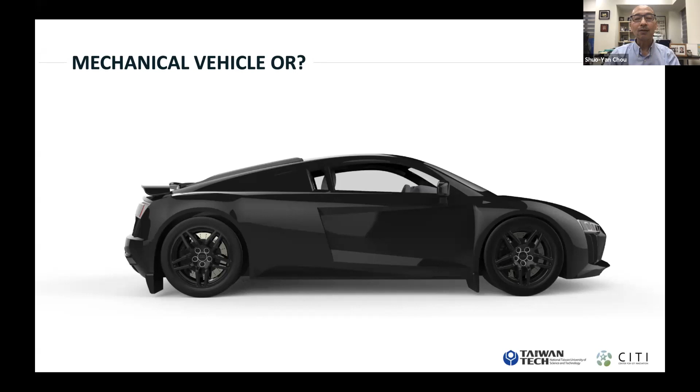Another thing I want to mention is traditional products which were numb, without any feeling or sense - for example, a car. Maybe most of us still think a car is definitely a mechanical thing. It was, particularly when using fossil-based energy. But now a car is basically a complex computer on four wheels.

Cars contain all kinds of sensors. Electric cars are powered by electricity - they don't have an engine, they have a battery, they have motors, and the rest will just be the body.

And then cars have a lot of electronics, lots of electronics. In fact, around 2015, on average 30% of the cost of a vehicle came from electronics and software already. There's a prediction that by 2030, or some say 2035, on average for a car, 50% of the cost will come from electronics and software.

For high-end cars it will be 70%, for driverless cars it could be up to 90%. So is it a mechanical product or an electronic product? It's just like our computer - it has a physical part, but it's all about function, just like our smartphone. Smartphones have all kinds of apps and chips which make them powerful. Cars will be like that in the future.

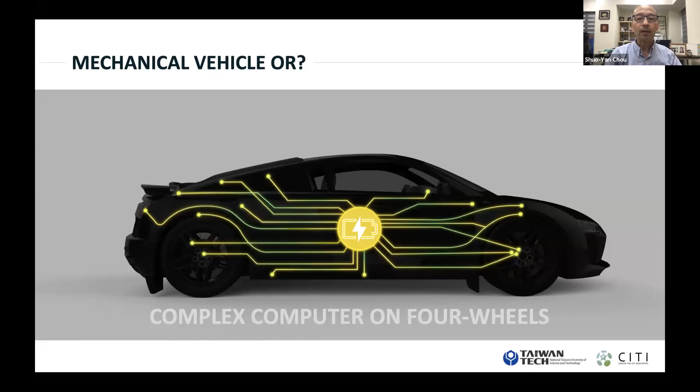In construction and buildings, we can also utilize RFID or sensors so that they don't need to be senseless again. The building is being built and everything there is numb, no sense, but now we can have all kinds of sensors. If some pillars tilt, we know. If the concrete was poor and moved on too early, we can sense it. And if a worker fell because of the sensor on the helmet, we can know.

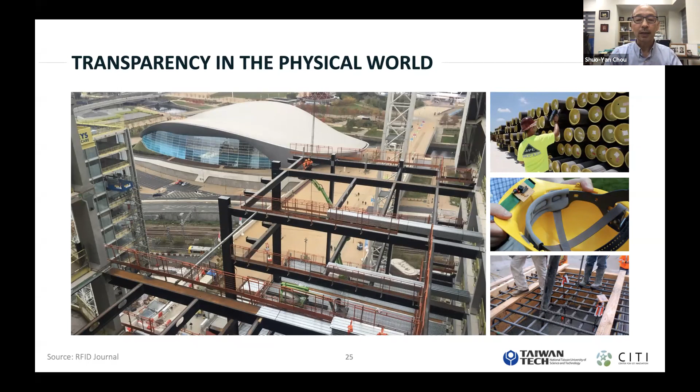When we want to pick up a certain item for the construction, and all of these parts look the same, we can use RFID and clearly identify that item. We can also count objects in the environment because we have a camera as a sensor. There are many different kinds of sensors we can use so that our construction work can also be more effective. It doesn't have to be numb, just there. Whenever we want to know what's going on, we need to have people going there, checking around, writing things, calling people. They can provide information to us constantly or continuously.

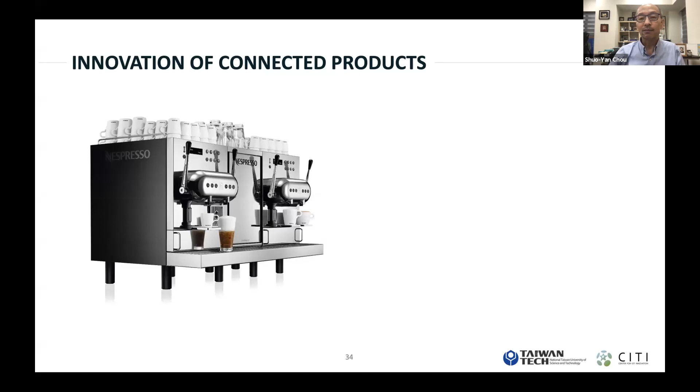You can think about it. There are many possible applications, and they have been developed by many other people too. I have some examples, but I think I'll just skip it for now. I want to show you a few videos at this point. Let's see.

Let's just say, if I'm asking about a helmet, we ride a motorcycle, we need to have a helmet, right, to protect our brain, our head basically. Although our hands and legs can be injured, our head is most important. It could be fatal. So we need to have a helmet protecting our head.

So if I said there could be an IoT helmet, what kind of helmet can you think of? An IoT helmet, think about it. What kind of sensors do we need for a helmet that would be helpful, or what kind of innovation can you come up with? Maybe you can type on the messaging board: what kind of sensors we can add to the helmet and how does it help us, or what kind of problem we have with the helmet and how can we resolve that problem using IoT technologies, basically sensors and responses.

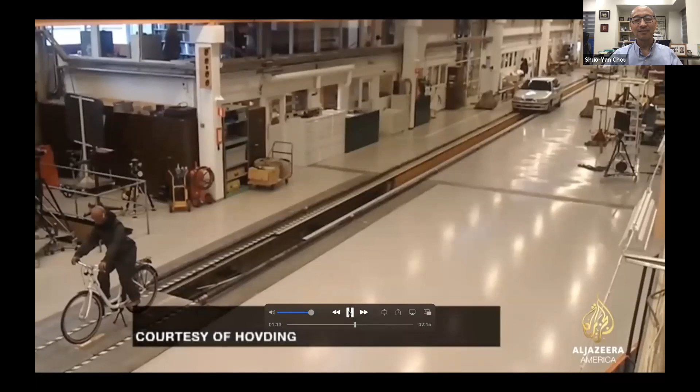Unlike a traditional helmet, the Hovding is wrapped around your neck, you zip it up, and you activate it. Now I'm fully protected and ready to ride. The collar has sensors which analyze movement patterns 200 times a second to determine when a cyclist is in a real crash. When that happens, an airbag deploys and wraps around your head and neck.

Each year, 300 people sustain head injuries in cycling accidents, and road safety experts say any initiative to protect riders is welcome. In Sweden, we have like 20 to 30 killed every year. Of course it's worrying, and we are working now to increase helmet use.

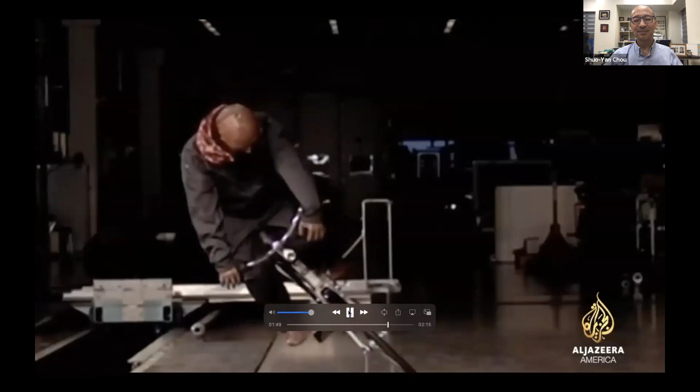Once the Hovding is deployed, it can't be reused. And at $540 a piece, some see it as an expensive investment. It's a little bit expensive, probably more expensive than my bicycle.

Okay, so let me also show you another video.

If I say that there are sensors on the umbrella, what do you think the sensor can do?

Mr. Benjamin said that the umbrella should be opened directly when there is rain. Mariam said the umbrella will protect from sudden heat, and Mr. Adam said humidity. But maybe I think I will need an umbrella that doesn't need to be held by hand.

Oh, okay, very smart. So how does that work? Let me see, I need to share my screen here. Can you see it?

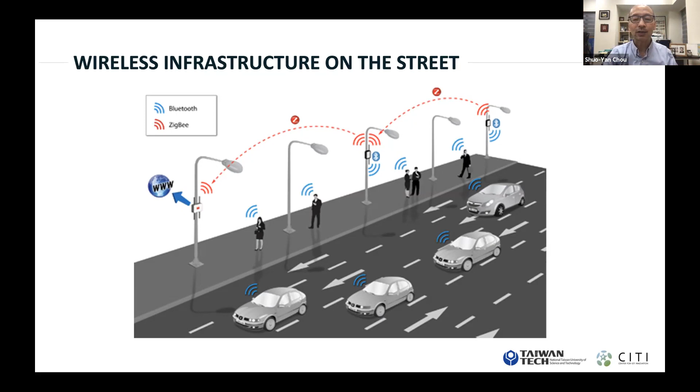I think for me, the most useful IoT application is exposing the location of public transportation. I took buses to school, and in the past, some buses came every 15 minutes, some maybe faster. During the course of the day, sometimes it's 20 minutes apart, sometimes 5 minutes apart. I couldn't remember all of it. So every time I went out, it was just taking a chance—like if I go there, it's there, very good, it just passed, then another 10 minutes, another 10, 20 minutes.

It is a mass-produced service, so you go there, you need to fit its schedule, and you don't have control over when it comes. Now, with sensors in Taipei, we have this—not as nice as it could be, but it's quite nice already. Using our app, we can see exactly when it will come, the next bus, and all the buses on the line—you know where they are, and they have estimated times.

Now I have a senior design project student, or we call it a capstone project student, trying to improve the accuracy of the arrival time prediction of buses. But at least we know that it's 3 stops away, 5 stops away. So every time I go, it's right before the bus arrives—maybe a little bit earlier, but definitely it's not guessing. I know it's 3 stops away. Maybe it will arrive earlier, maybe later, but I know pretty much where it is and how far away it is.

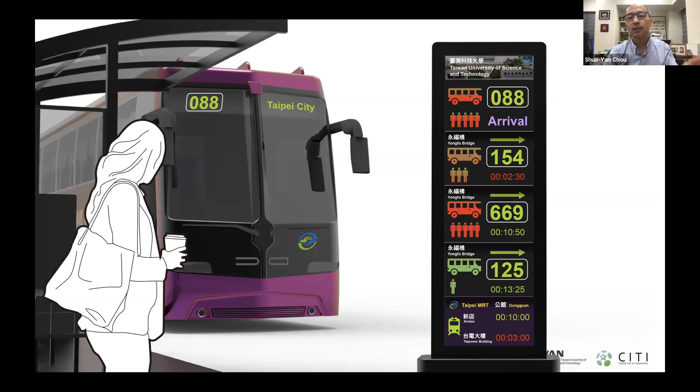When it's going to arrive, whether or not it's crowded, and so on. And even so at home, we can just look at the information too. And it is not that easy to set up a post by the street showing the bus location.

It is very difficult. In fact, in Taiwan, in Taipei City, to put up a post showing that information, you need to go to 12 government agencies to get permission and get data together before we can put up the post. It's very, very difficult. But once we have that, it's quite convenient. People are quite happy with the information of the arrival time of buses. So we can see that too.

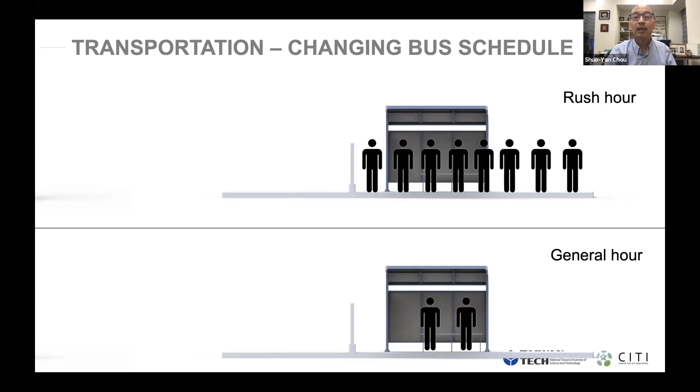And with that, we can even make the bus schedule more sparse, but maintain the same service level. I mean, for me, it doesn't have to be every 5 minutes. 10 minutes is fine, as long as when I go there, the bus is there. So it doesn't have to be that dense.

It can be a little bit more sparse, and it will serve the purpose, because there aren't that many people taking that route. If you make it too dense to create that kind of service level, it is a little bit wasteful. So you can make it more sparse, like from 5 minutes to 15 minutes, but people know exactly when the bus will arrive, so they can catch the bus all the time. So that can even help to reduce the cost for bus services.

Not sacrificing the service level. We still want to keep the same service level, but find a different way to keep it. So we want to provide information to customers so that in terms of management and perception, it still satisfies the customer needs.

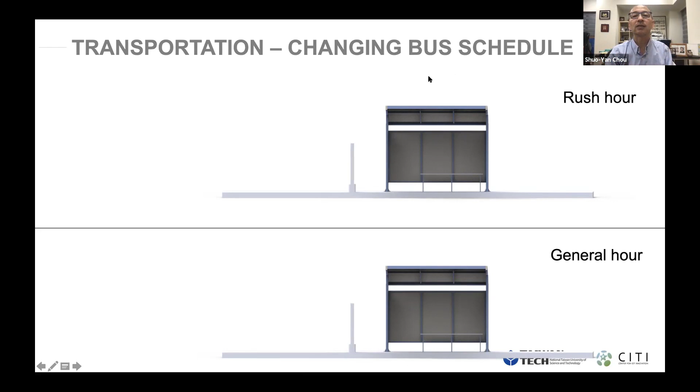And we can also coordinate the traffic lights. It's definitely not that difficult, though I think more and more it's getting more complicated. Meaning that when the bus is coming, if the traffic is not that heavy and there's no car on the other side, they can change the traffic light, allowing the bus to arrive at the bus station.

Later we'll also see in the future, for the driverless bus, for the electric bus, the bus is just like a small car. It will become a very important vehicle for the people inside to communicate with the rest of the world.

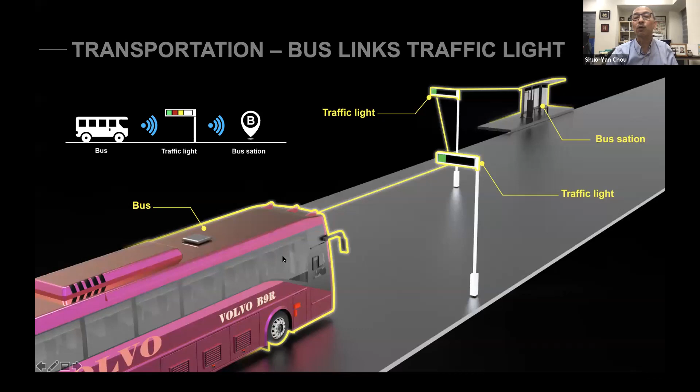So the bus can communicate a lot of information with the bus stop, like how many people are at the bus stop. People at the bus stop can also know how many people are in the bus. And earlier we saw that they know when the bus will arrive, and so on. I also mentioned traffic light control.

In fact, it should be traffic control for allowing ambulances, fire trucks, and emergency vehicles to travel more smoothly and more safely on the street. That can be coordinated.

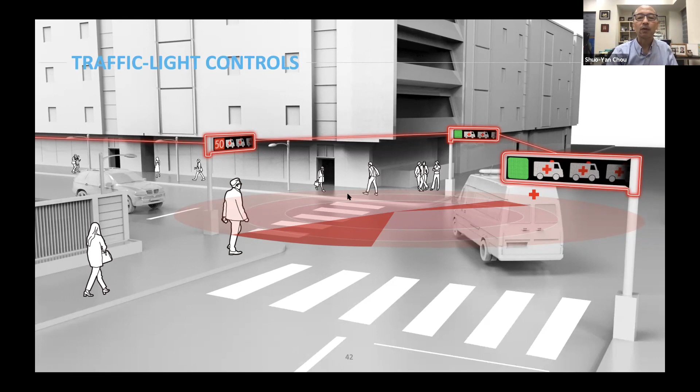But again, it's a very complicated issue. Traffic light is a very important facility, so the safety of the data, the power of the traffic light, and so on is not something simple that we can easily change. But with IoT, gradually, I think we can also make improvements to improve the traffic speed of ambulances and other emergency vehicles.

And I think in a lot of parking lots we have seen a function where they help you find your car, help you find where your car is parked. I'm not sure why it has to be like that, but in Taipei there are big parking lots.

On every 3 cars there are cameras, so the camera can see your car. If you park at a certain location, it will take a photo and use license plate recognition software to record the information in the system. So when you return to the parking lot and can't remember where you parked your car, you can just type your license plate number and it will show you where you parked.

I feel that it's quite costly, since every 3 cars there's a camera facing this way and that way, but that is already not that rare. I think quite a few parking lots have that kind of service.

Of course, there are also outdoor parking. If you use Google Maps on your smartphone, when you leave your car for business and return, you may forget where you parked. Your phone actually knows, because as you were moving and then stopped for a while, it detects you've parked since you were traveling fast and now moving very slowly. So your phone records your location when you left the car and started walking, and it can guide you back to find it. It's a bit of a dangerous function, but once sensors can deduce different situations, they can provide additional services.